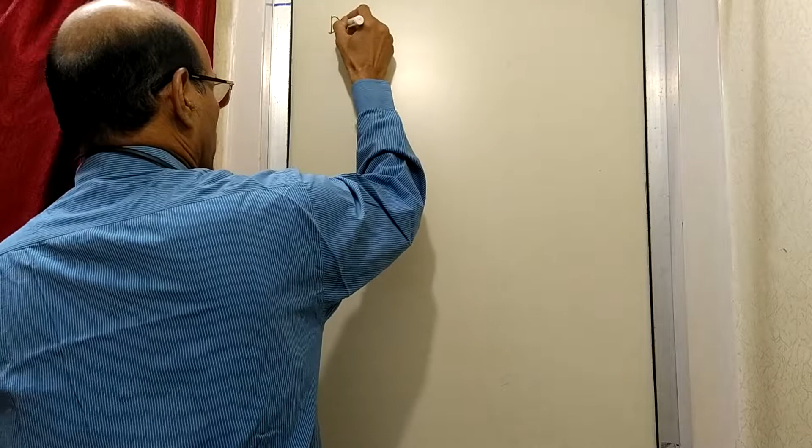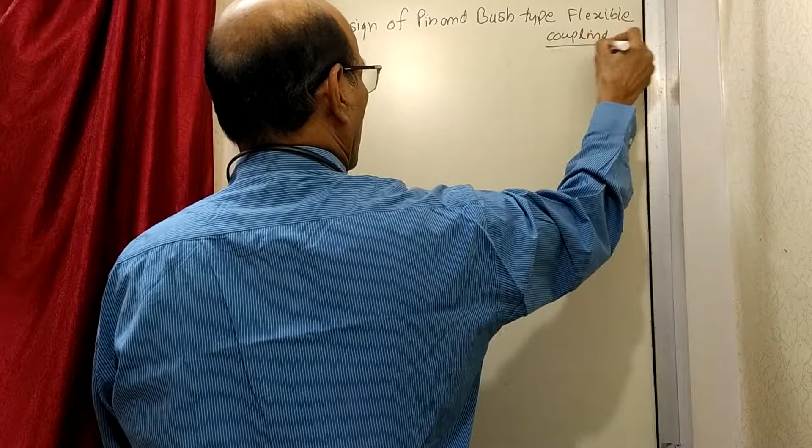It is flexible coupling. Design of pin and bush type flexible coupling, it is.

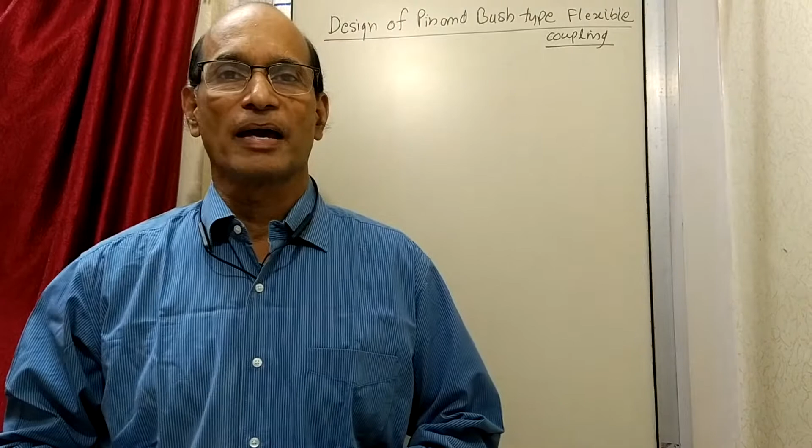Now you all know what is a flexible coupling and what is this pin and bush type coupling, because earlier, sometime back, we drew a freehand sketch where we understood how this particular coupling functions. The very fact that it is flexible coupling means it is fitted on shafts. These two shafts are not going to be in one line because of vibrations and some misalignment. The two axes are going to have misalignment all the time due to vibrations, so under this condition we are supposed to transmit the power.

If we use rigid coupling in this case, then it will not work, because rigid coupling requires the two axes to be perfectly aligned. You will also notice that in the case of earlier rigid coupling, the two flanges are located in each other with the help of that 1mm or 2mm step. So both flanges were located properly, and then the bolts were passed for the purpose of only clamping the two flanges. Otherwise, the location part was done by the steps, and that was possible because the two axes were perfectly aligned in case of rigid coupling.

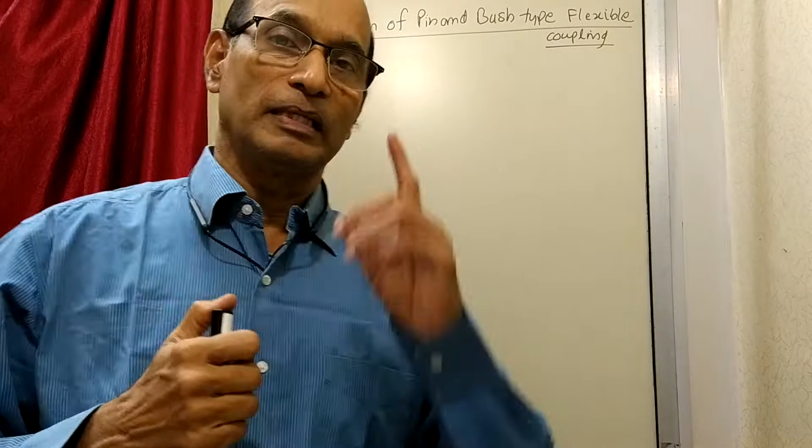But that is not going to be the case here. The two axes are not going to be in one line. Under this condition, when you want to connect the two shafts by the flange coupling, the way the two flanges are connected by nut bolts, the nut bolts should be such that they are covered by some kind of flexible material. That means the bolt is first of all a special bolt, and that bolt is surrounded by a rubber bush.

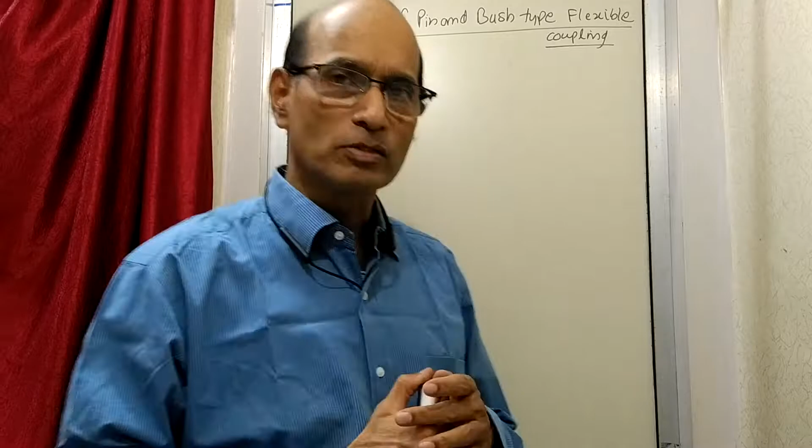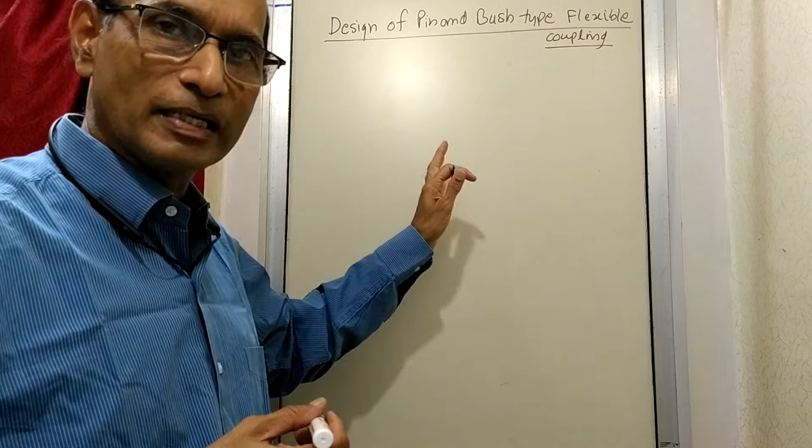So now what we'll do is start the design, and the things which are common with the rigid coupling we will eliminate, in the sense that they are to be done the same as earlier. So whatever is to be done same as the rigid coupling, we are just noting but not going into the details, whereas we are concentrating on those things which are different here. I'll draw the sketch only to the extent it is new; the rest of the things are same as rigid coupling.

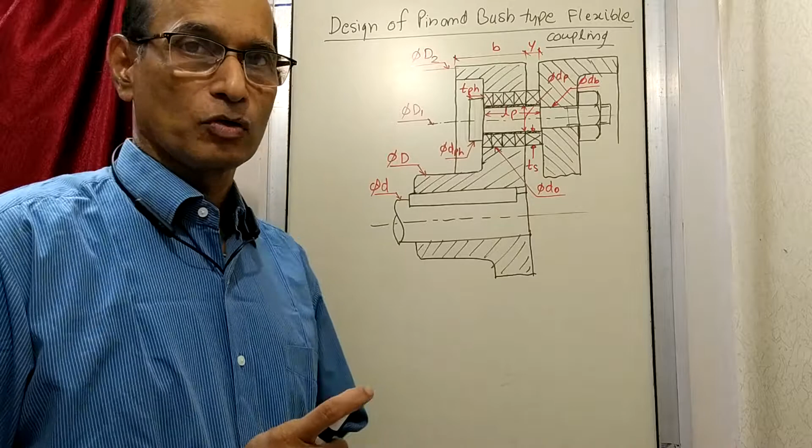Okay, so now you can see that we have drawn the pin and bush type flexible coupling. As you will see here, some of the things are common and this part is different.

So what you see here is, last time there was just a pair of nut bolts used here for clamping the two flanges. Whereas now, if you see, the difference is, first of all, this is not a standard bolt, it is called a pin. This pin has been given some kind of threading here.

And you will also see there is a step here. So here the diameter is dp, the diameter of the pin, and then db is the diameter of the bolt. So there is a difference between dp and db, a small step, some change in diameter.

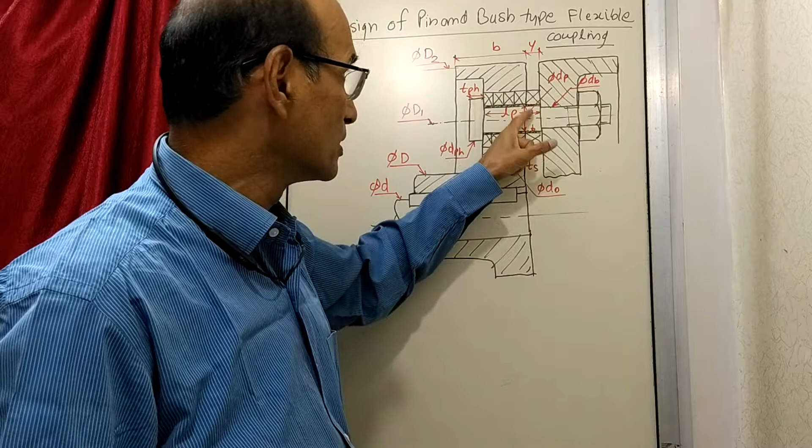And then on this diameter of bolt, there is threading done on this side. On this side, there is the diameter of pin, and after the diameter of pin, there is dph, that means the diameter of pin head, which is slightly larger than the diameter of the pin. And then it has got a certain thickness also, this is the thickness of the pin head, this is the diameter of the pin head.

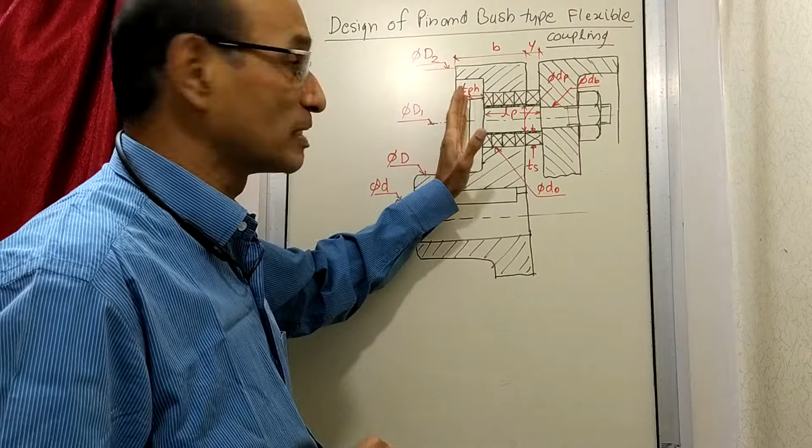Now this pin head is covered within the flange, which has got an extension. So this is a kind of protected flange. It has been given some extra collar so that the head remains inside the collar on this side also. So the entire pin, on either side, is properly covered by the extension given to the flange.

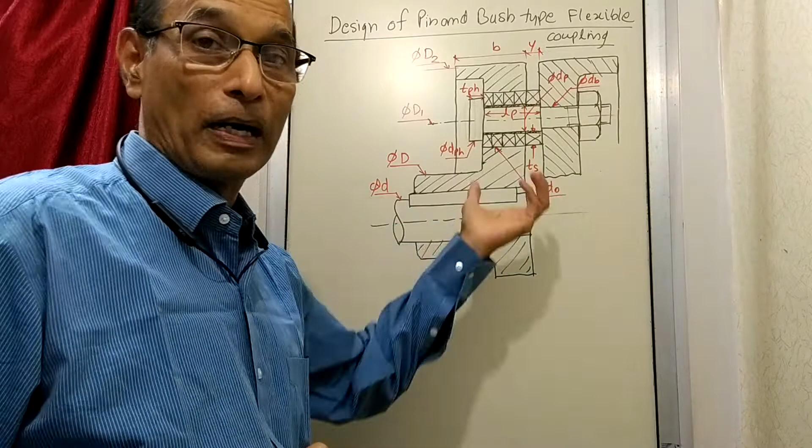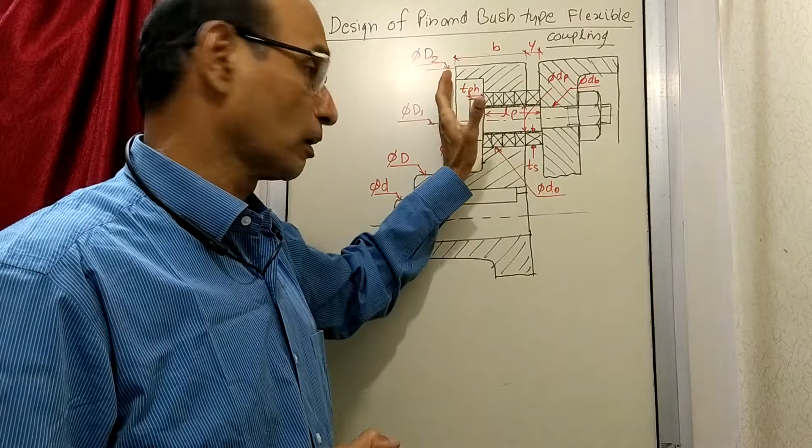So this protection is for whom? This protection is for the operator, whoever is operating this particular machine. When it is rotating, these bolts and their heads should not project out, because at the time of rotation it might create some accidents. Therefore, they are covered inside by extending the flange like this in the form of a cover. So that is the basic arrangement.

And you will also see here that there are rubber bushes.

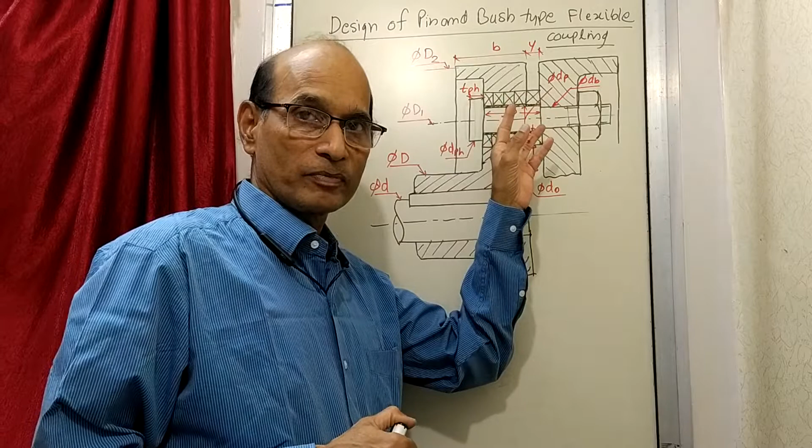Now these rubber bushes, in this case I have drawn 5 bushes. This bush has got internal diameter fitted on some kind of sleeve. What you see here, the dark colored ring, is called the sleeve. That sleeve covers the pin diameter, so it is outside the pin diameter, and the rubber bushes are fitted on this sleeve.

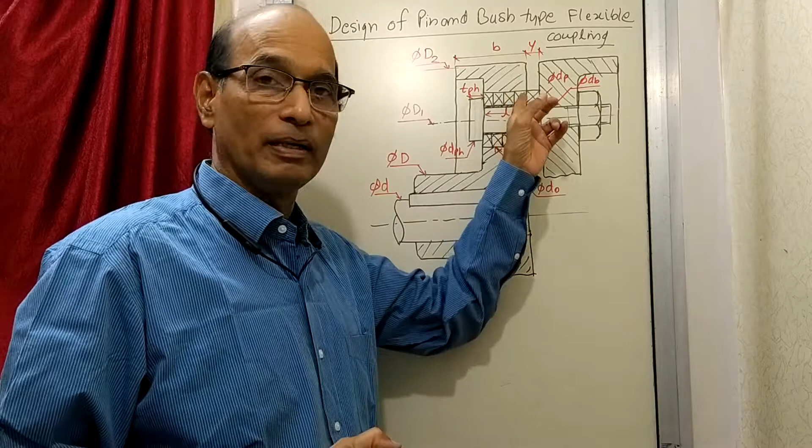The rubber bushes are not a single bush, the entire length is covered by multiple bushes. The reason is, suppose there is damage to any one bush, that bush alone can be replaced with another piece, and the rest can be utilized. If it were one piece and damage takes place, you would have to throw away the entire bush. So that doesn't happen here, that's why it is split into multiple pieces.

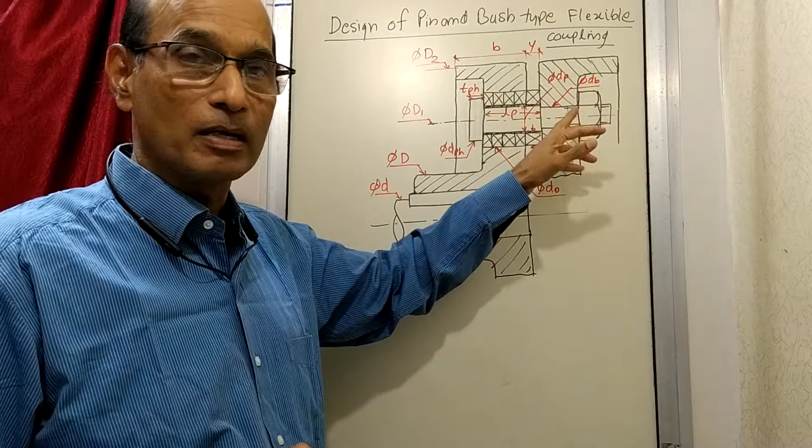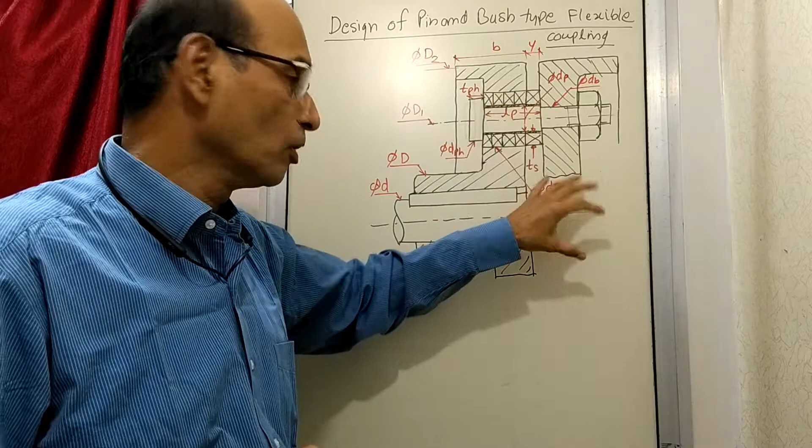Now what happens is, as rotation starts, the two shafts are not in one line. There could be vibrations, but in spite of the vibration, the drive can be transferred because the rubber bushes are of a flexible material. So slight variation, slight change in position, they can absorb and take care of all the slight misalignment during power transmission.

That's why this is called the pin and bush type. This is the pin, this is the bush. So this is a pin and bush type flexible coupling. That is all about its construction.

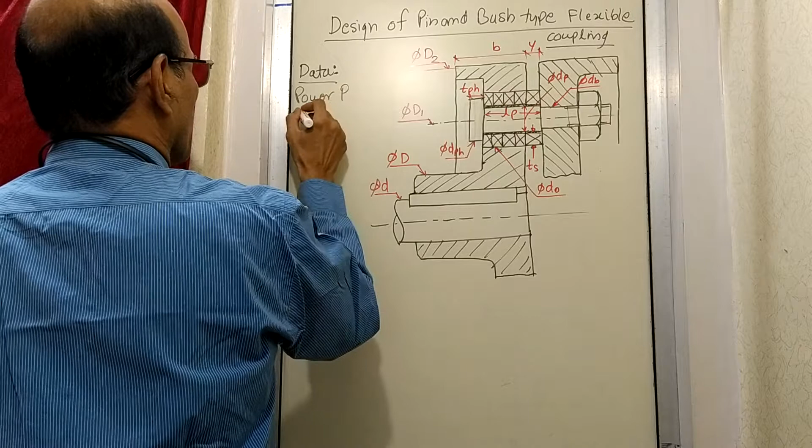Now let's see how it is designed. For design purpose, certain data is given, almost like usual. You are given power transmitted, then the speed, power transmitted and speed, and some more parameters like stresses, of course FT design, and once you get FT design, other stresses you can find out.

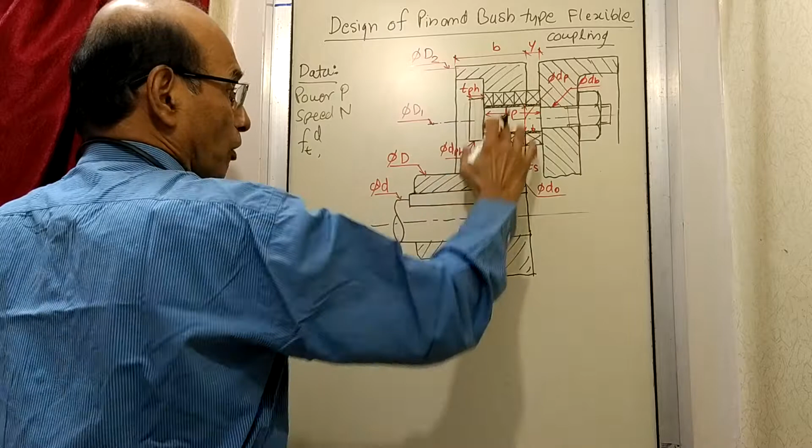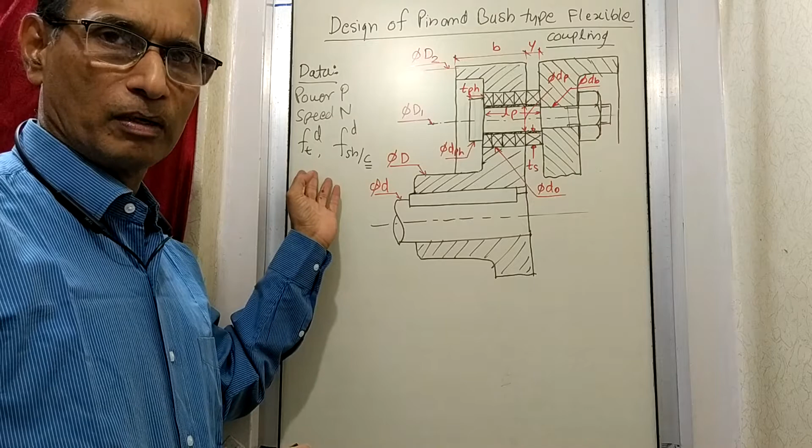Here the stress will be given for the steel material, that is nut bolts, and even for the keys the same, but for the coupling probably the material can be given as different. So I'll write FTD and F shear design, and this is for C, for coupling. So for the coupling material, the design shear stress will be given as a different value because it is a different material than the bolts. One value of stress for the steel material, the other value for the casting material used for flanges. Then you have to find all the dimensions.

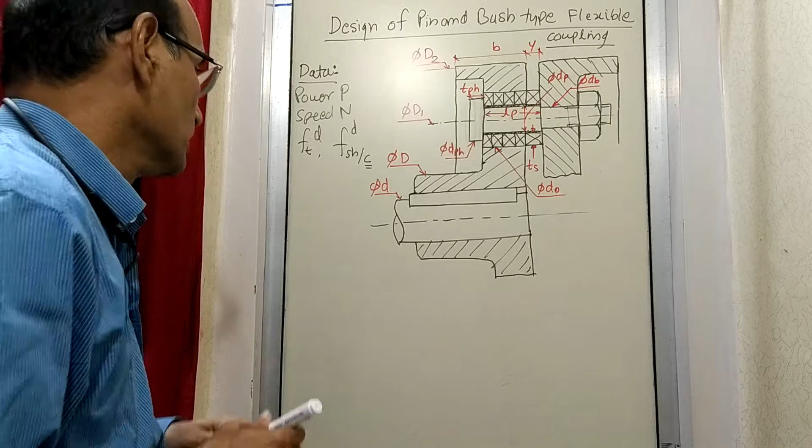Now let's see how we begin. Certain things are same as I said earlier. We will start with finding out the shaft diameter D, that means this diameter, that is the first thing.

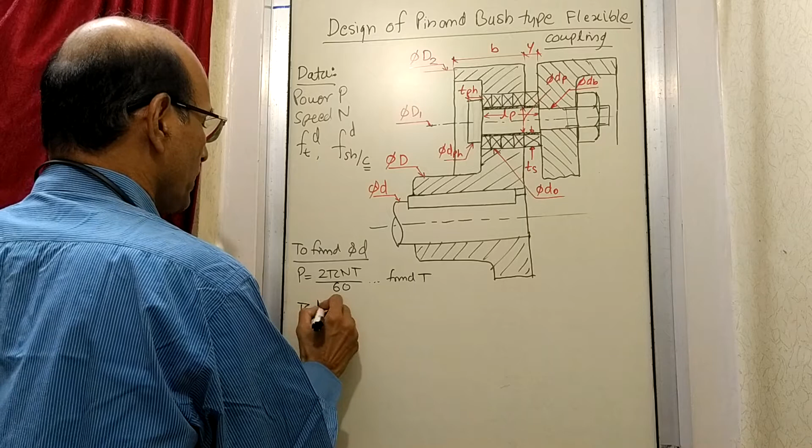So to find the shaft diameter: power is equal to 2 pi N T by 60. From this you find torque, and then pi d cube by 16 into F shear stress design is equal to torque. From this you find the shaft diameter d.

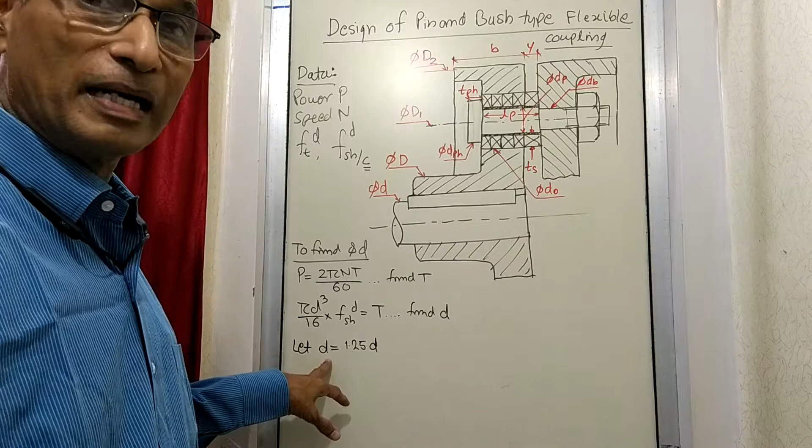Now in this case one more thing is done. Let d be equal to say 1.25 times d. That means whatever diameter you get, you increase it by about 25%, round it off to the higher side. This is done to take care of vibrations in this kind of unit, since there could be some shock load which might come, some cracks might develop. Therefore, for safety, the diameter is increased on the safer side by about 25%. So this becomes the design diameter from the diameter obtained earlier.

So we got the diameter here, then design of key. To design the key, I'll write here. Now for designing the key, as you know, you find W, T and L. I will not explain this part because it is same as earlier, so you'll find the sizes of the key.

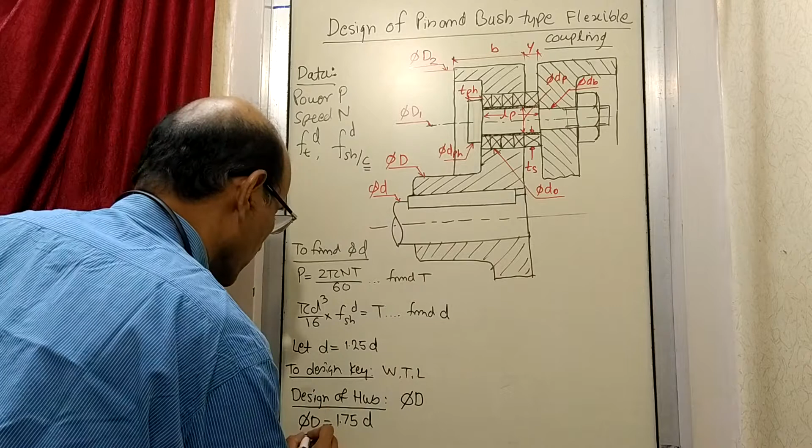Then comes the shaft, the hub diameter, capital D, design of hub. Now certain empirical relations we have. According to that, diameter D is taken as 1.75 times the shaft diameter. Then the diameter D1, that is the pitch circle diameter, is 3.5 times D.

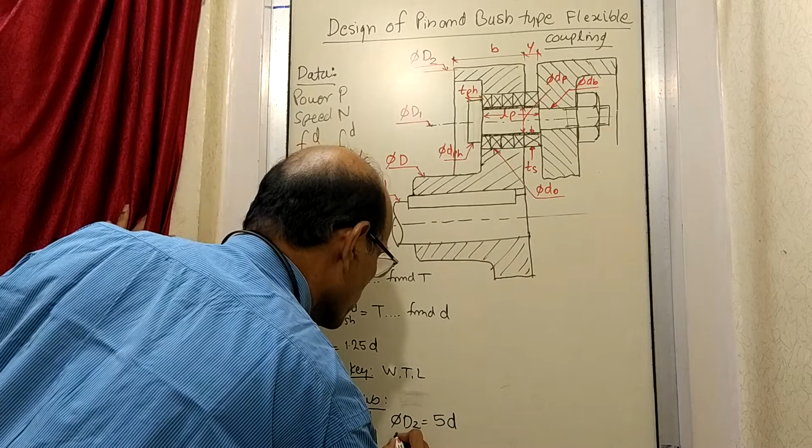Then the outside diameter, that is D2, is 5 times the shaft diameter. Shaft diameter 5 times gives you D2. Then the thickness of flange, TF, is 0.25 times shaft diameter.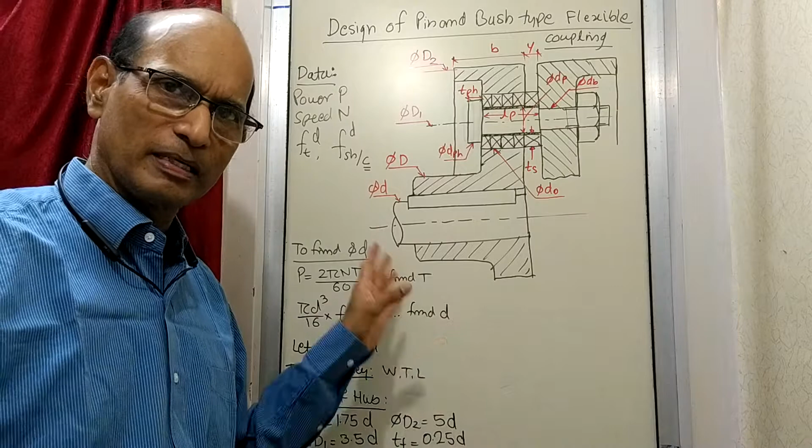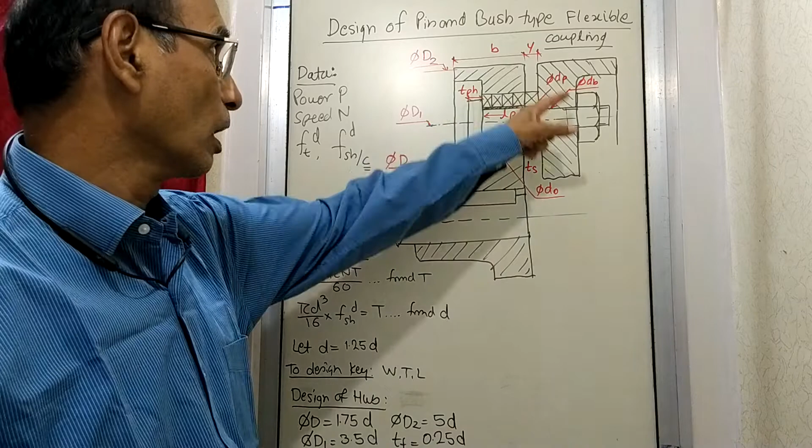So we have got the values of different parameters, and then as usual we have to check, just like last time, shear failure of flange, and the torsional shear failure of the hub, and so on, same as earlier. Now what are the new things here? The new things are involved around the pin. So let's see now, design of pin, which is the new thing here.

Design of this pin. Now what do you find here different? First of all, it is not a bolt, but then still stresses will be there. The only thing is we have to find out what kind of stresses will be acting here.

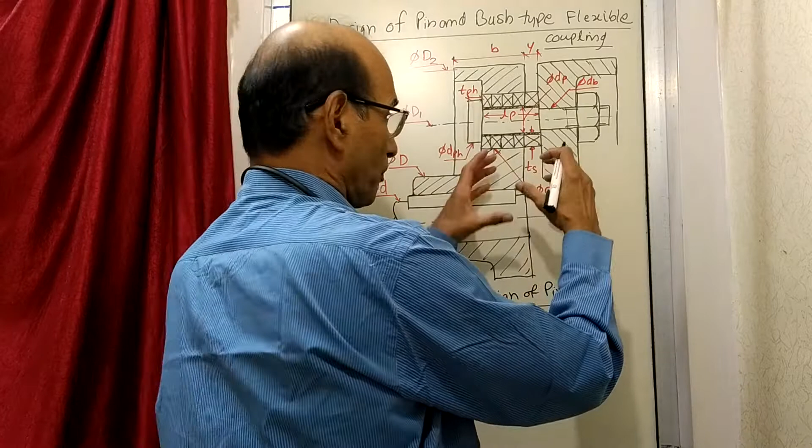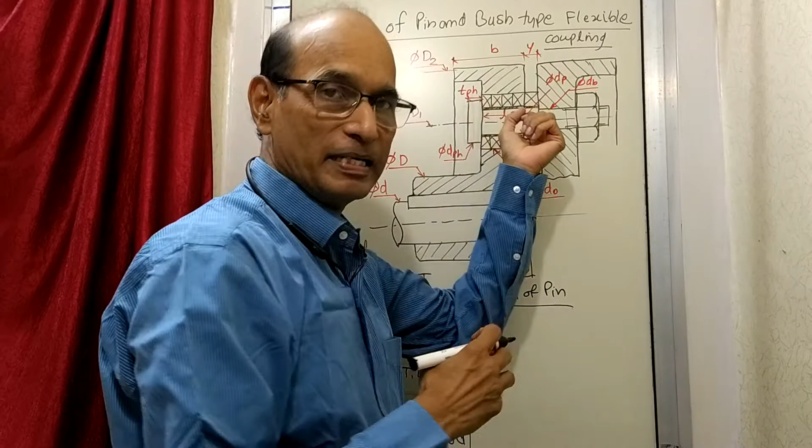So now as you see here, first of all, these two flanges, they are separate. In the last example, the flanges were engaged in each other. Both the flanges were located in one diameter, some 2mm step, and at the same time they were tied here. So they were working like a single piece. Now that is not happening here.

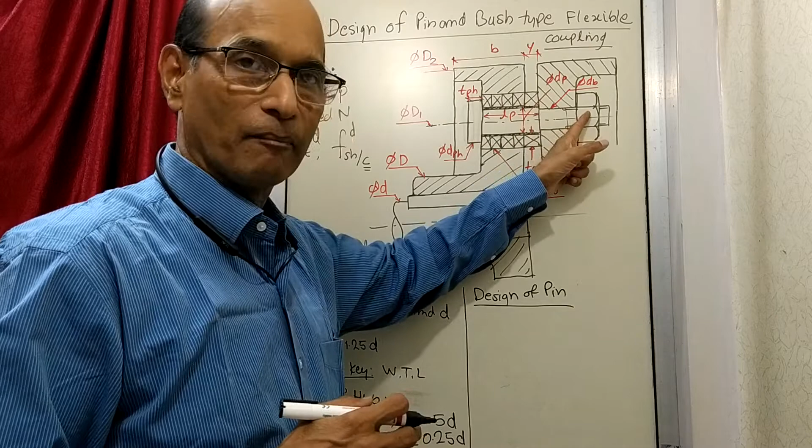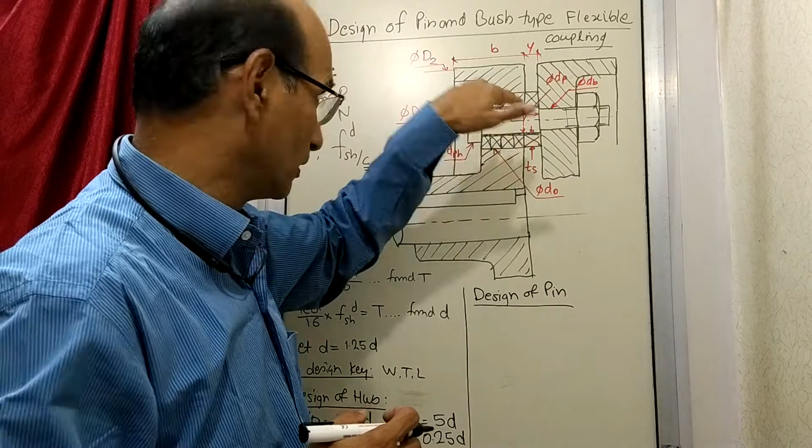So the power is getting transmitted from one side through the rubber bush on the other side, and then like this. So there is a chance that this bolt is going to get bending stress. Why bending stress? Because the bolt is fitted with the help of this taper and clamped by the nut on this flange. So this bolt is something like a hanging part. Now this hanging bolt is pushed by this flange. So when you push it like this by the force here, which is because of torque, that is going to cause a bending action on this part of the bolt.

So what we now have to do is design this particular bolt considering the bending stresses also, and it is also going to have shear stress. So this is going to be a case of combined stress, shear stress and bending stress. You have to combine them by the square root equation and get the principal stresses, and those principal stresses should be within the limit.

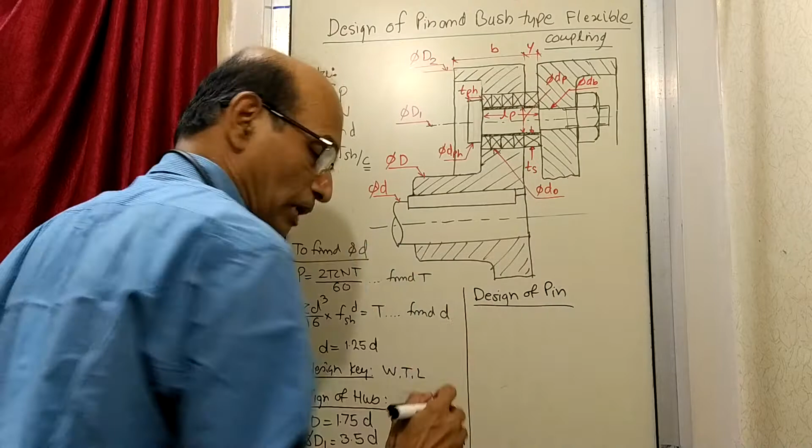So now how this is done is, incidentally in the design of pin there is one more formula available as an empirical relation, which says diameter of bolt is taken as 0.5 times d divided by square root of n, where n is the number of bolts.

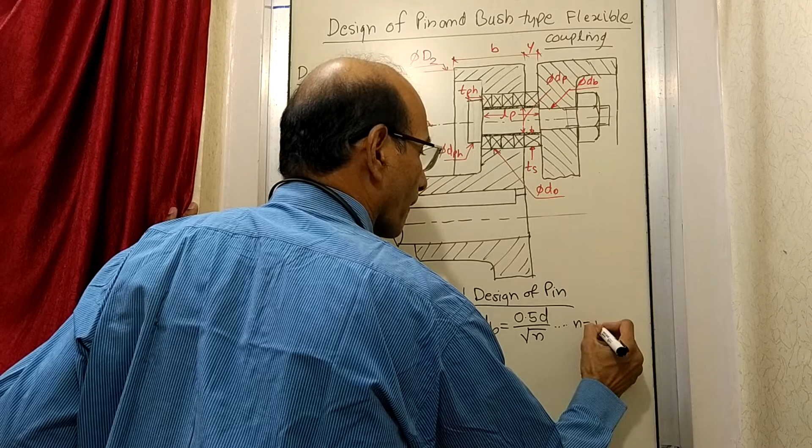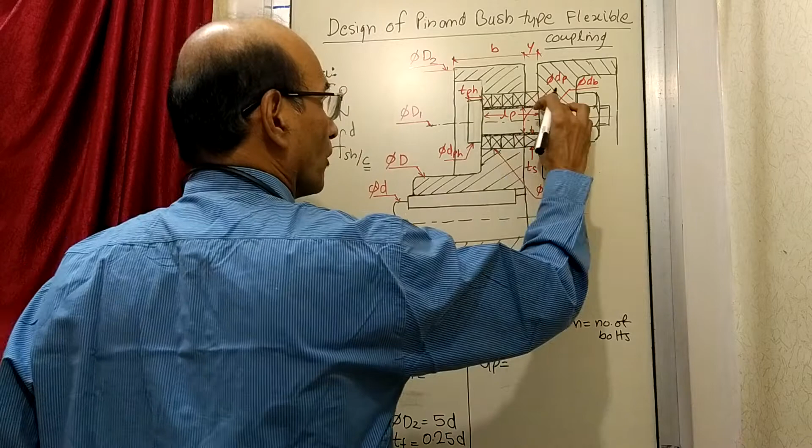So they are found out by the chart, or maybe given in the data itself sometimes. So you will get the diameter of the bolt, how much it is supposed to be. Knowing the diameter of the bolt, then other things, diameter of pin. This diameter of pin is larger than the diameter of bolt by a few millimeters, 4 to 6mm extra. So this is dB by empirical, and dP equals dB plus 4 to 6mm.

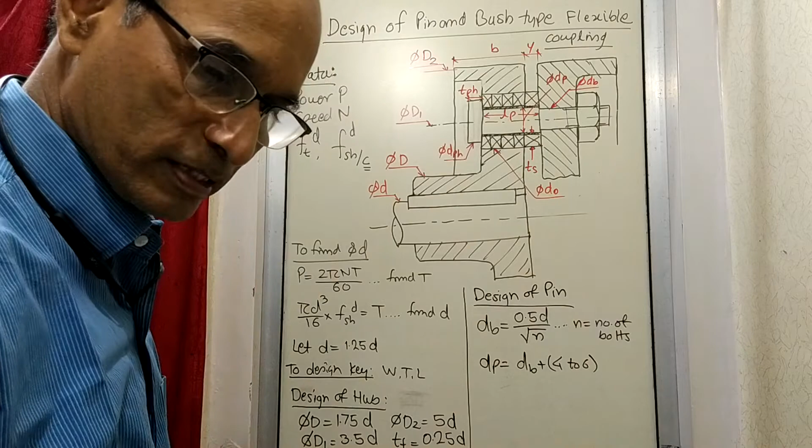Then the length of pin also is available by empirical relation, 1.5 times the diameter of pin. So diameter of pin and length of pin, length of pin is 1.5 times the diameter of the pin.

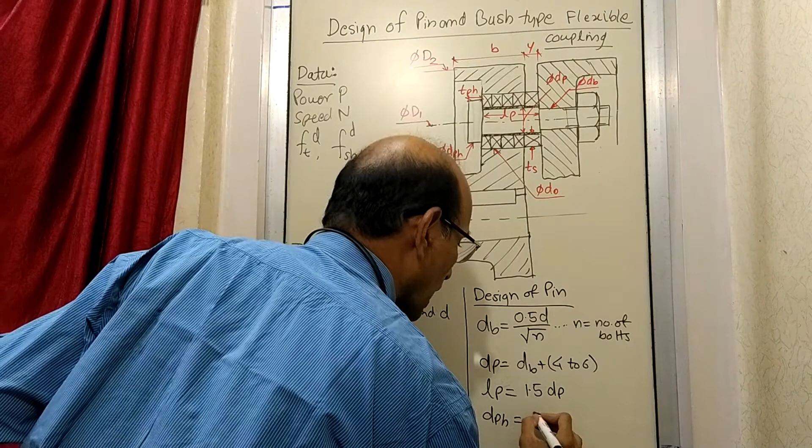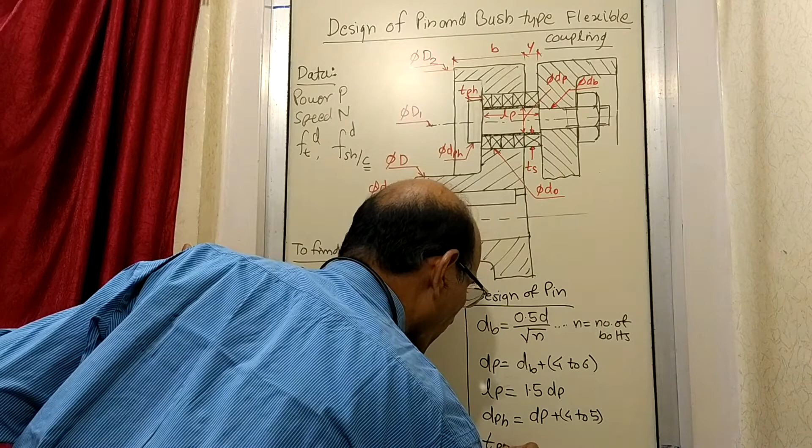Diameter of pin head. Diameter of pin head is another few millimeters extra, so diameter of pin plus 4 to 5mm extra, another step here. Then the thickness of pin head, this is 4 to 6mm, this is also 4 to 6.

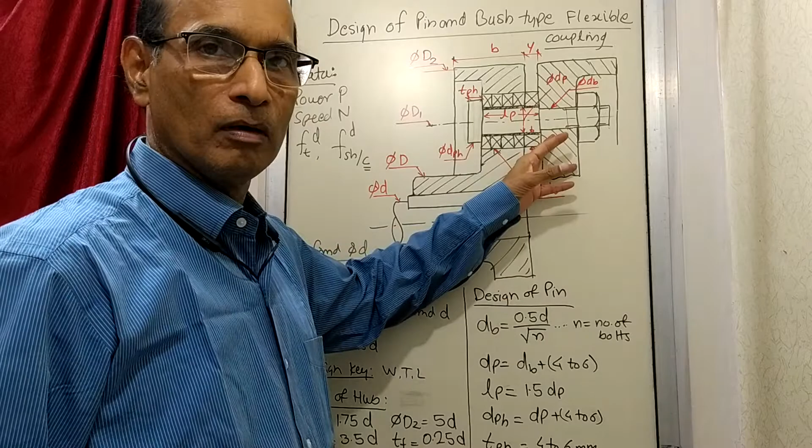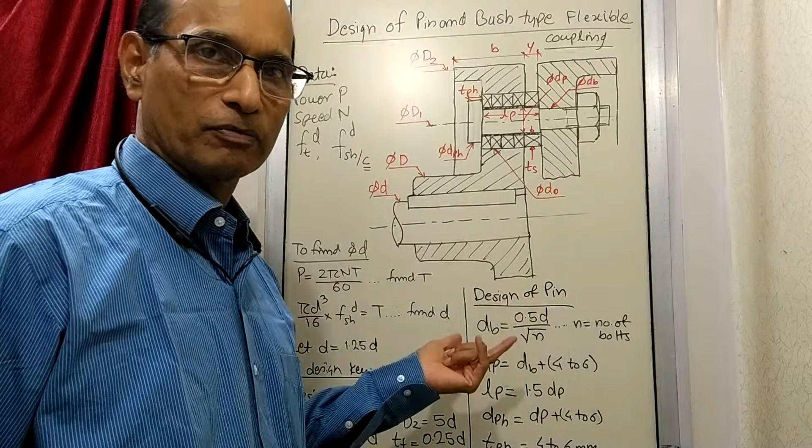That means at this stage, by using all these empirical relations, you will get the full size of the pin. Now once you get the size of the pin, the work is not over, because we have to check it. So whatever sizes you obtain, in fact you have obtained sizes on this side also. Whichever dimensions we have obtained, they need to be checked for various stresses. Out of that, this part you know how to check. These dimensions which we obtained for the pin, we want to check them. So how to check the dimensions of the pin, that we will see now.

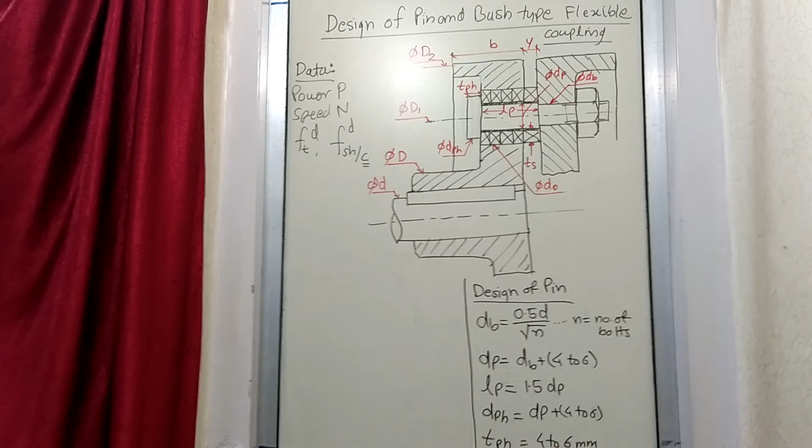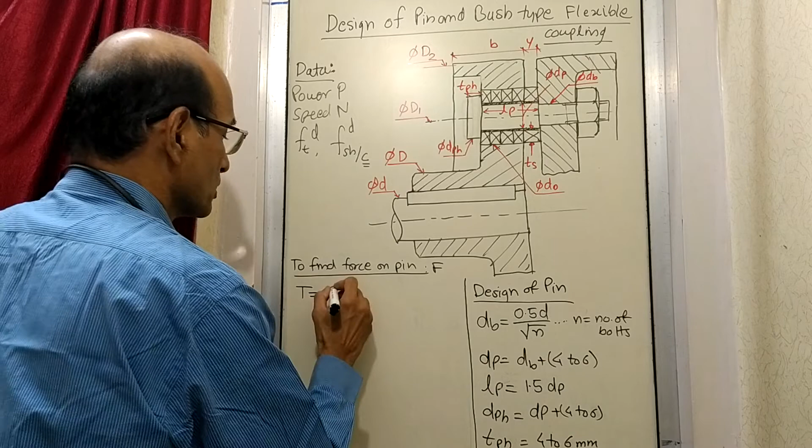Okay, so now we are checking this pin. We start like this, to find force on pin, that is F. Suppose there is F, a force acting at this place. So how much is F? Now this is the force on pin per pin. So this force will be equal to what? There is some torque acting here. So this torque is equal to force, number of bolts, into force per bolt into the radius here. Now this radius...